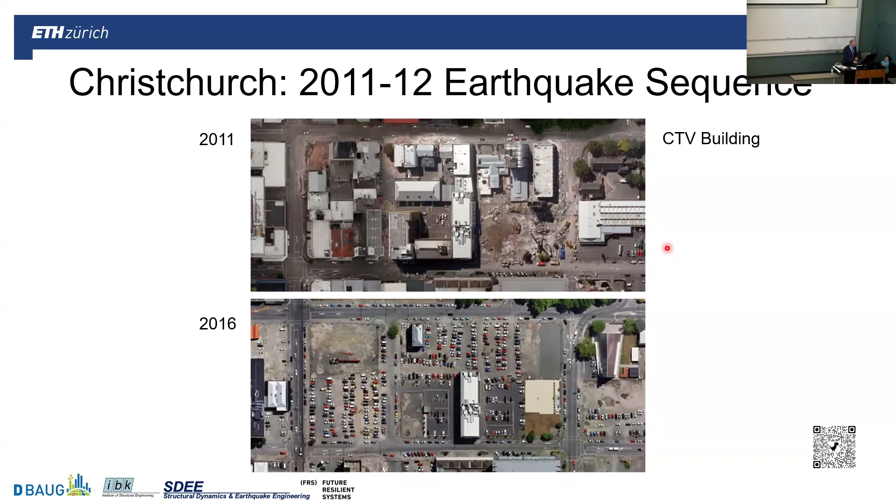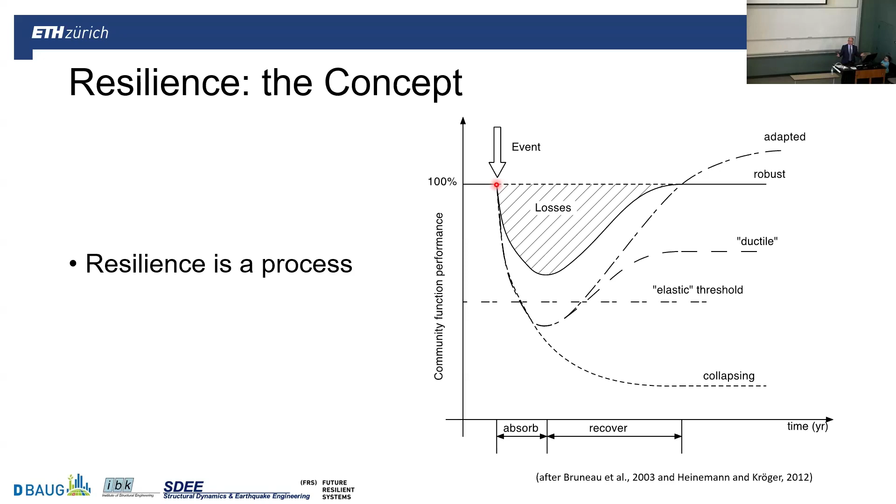When we talk about resilience, there are many definitions. There is even a presidential definition here in the US. But whatever they are, this resilience thing is a process. It is not a static situation that we have. It is a process of acceptance, absorption of losses after an event in the immediate aftermath, and of recovery in the longer aftermath—weeks, months, years—that leads to adaptation of a particular region or a particular structure to the effect of the disaster, the effect of the event, and improvement, or perhaps collapsing and just not being there anymore.

This understanding of resilience has been around at least since 2003, and in the civil engineering community, probably since a few years later. But it's already been 10, 15 years that we've been doing resilience-related research. And it's time now for action.

They will receive some funding that they're supposed to use to reduce the impact of climate change. That is the most important focus now, but also of natural hazards. So there is a mechanism instituted in law in this country that enables counties to do something. Are we as civil engineers ready to help them do these actions right? That is the question that I'd like to address.

How can we make sure that the communities that will have this funding, and the communities that won't but may see themselves as vulnerable and in need of resilience increase, how do we make sure that they are able to do something on improving their resilience, and do something right on improving their resilience?

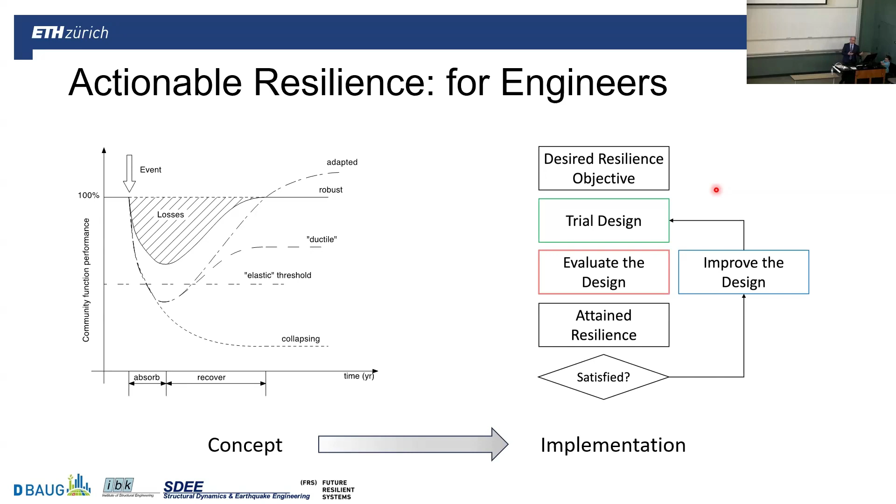So going from the concept to implementation, what I'll try to say is, yes, we can go and formulate a design cycle aimed at resilience. Let's start with the first ingredient, and that is the risk itself, the effect of the event on the community and on the particular structure.

When it comes to structures, for more than 25, 30 years we have been discussing the concept of performance-based design. It has to do with the recognition of the spectrum of damage that can happen to a structure. For convenience, we often discretize this into a few damage states, 4 or 5 perhaps. But it is the spectrum of damage and the spectrum of consequences—the deaths, the dollars, and the downtime—that we deal with in terms of performance.

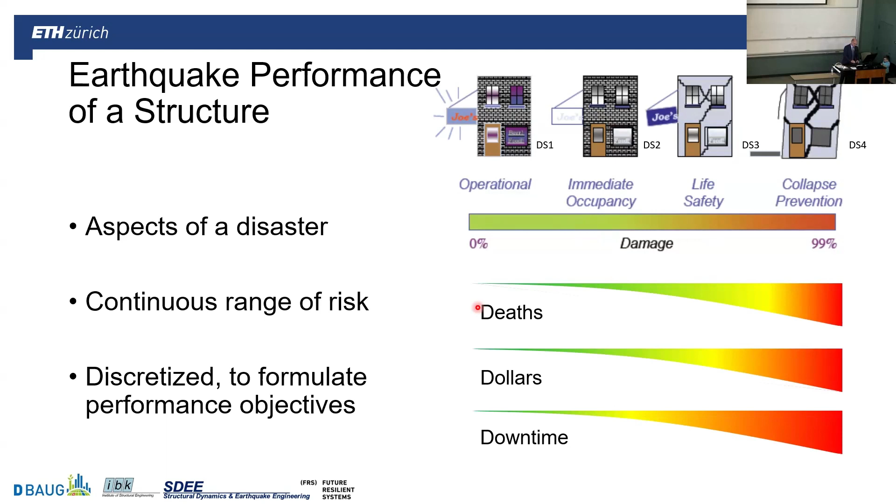This concept of performance-based design, thought about in the mid-90s, has pushed our profession from purely safety-based collapse prevention, safety factor type design, through probabilistic applications of reliability, towards designing for multiple performance objectives for a single structure. This is coming into practice, and is already in practice today.

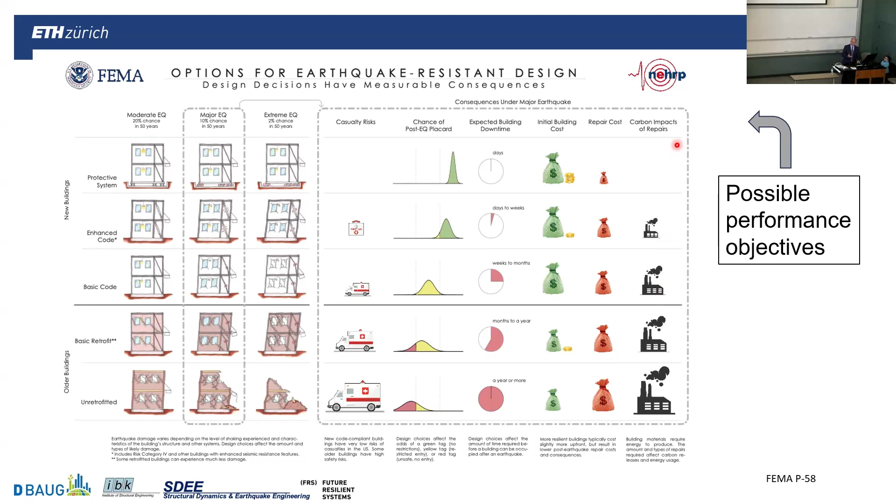So the number of performance objectives has also increased over time and started to include a much broader set than just dollars and downtime. This is the framework that was developed at the Pacific Earthquake Engineering Research Center, but also at similar centers around the same time.

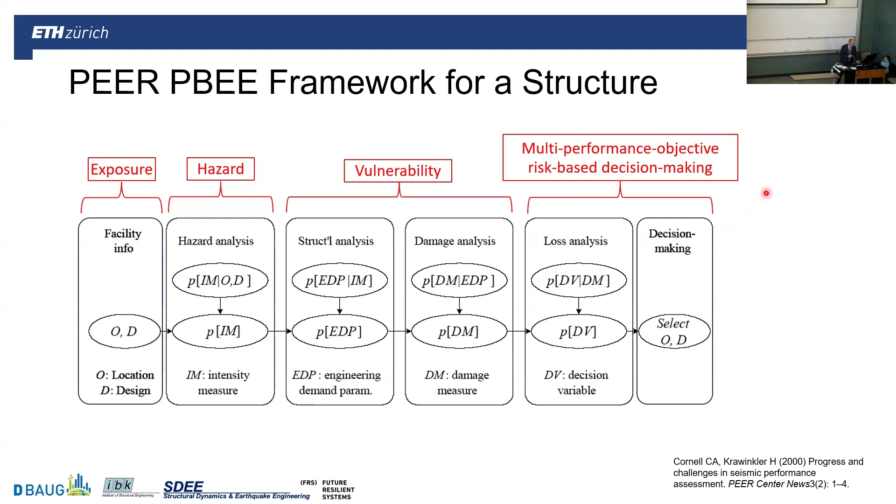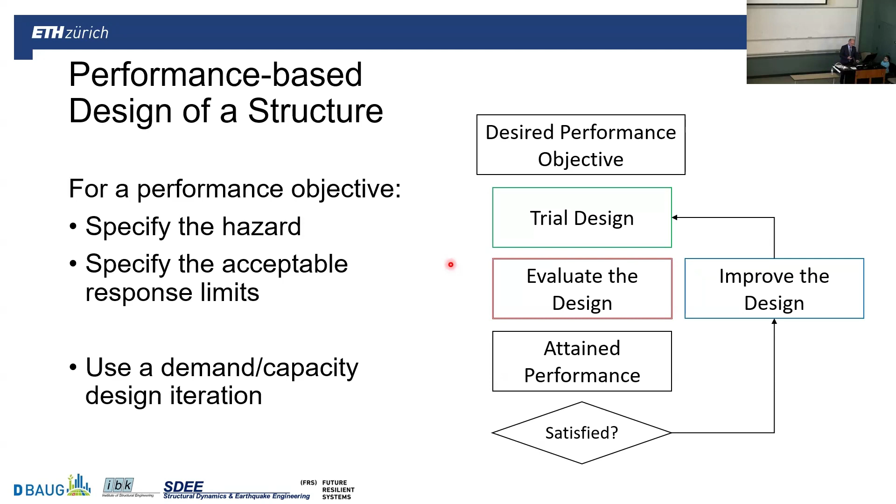This is how performance-based design is constituted today. For a specific hazard, we define the performance objectives in terms of the acceptable response limits. We develop a trial design, we evaluate the trial design. Many of you have perhaps done pushover analysis, some of you have done multiple time history nonlinear analysis to do this, looked at various aspects of the structure, determined if the performance is okay or not, and then perhaps changed the structure to make it behave better.

But what we noticed with some satisfaction is that in technically developed parts of the world where code compliance is high, we are not having as many casualties as we used to. Take the Taiwan earthquake a few days ago—it was a 7.4 in a relatively densely populated island. Even though we see similar soft story collapses as we usually do, the number of casualties is much smaller than a few decades ago.

And it has to do with the improvement of the buildings, but it also emphasizes another aspect of resilience, and that is this recovery process. What we want to do is design our structures so that yes, they do not kill people, but also they are relatively fast and easy to recover and reconstitute their function. So functional recovery becomes an important issue.

So we need to think about rebuilding from potentially collapsing situations, hopefully not too many of them. We need to think about repairs in situations when we have life safety performance, both of structural and non-structural elements. And then when we get to a situation when the building, or many buildings in the region, are just fairly okay—perhaps they don't have power or water—we need to talk about restoration of building functions.

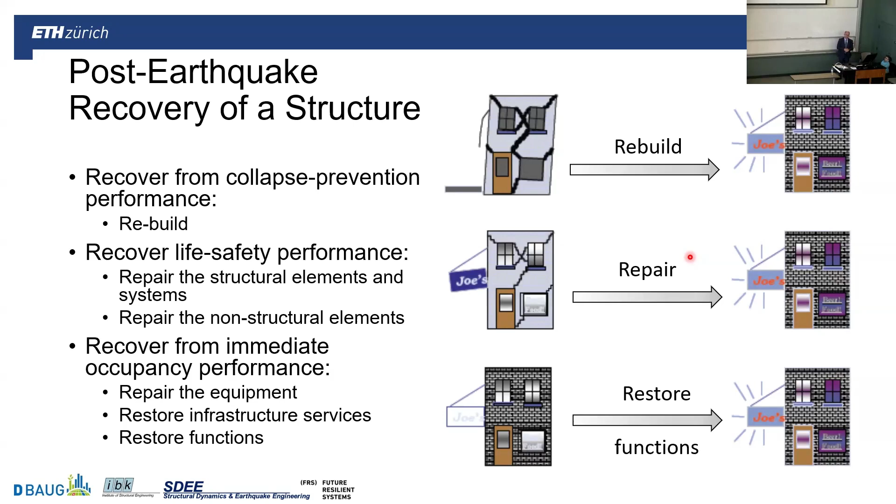In that sense, the process needs to be understood, the process of recovery. One thing that has been emphasized—Professor Mary Comerio from Berkeley did this in the late 80s—is the set of tasks that one has to do before a building repair or recovery needs to start.

Those are inspections, the cleanup, the design of the actual repair, the financing and contracting of that, then the permitting, and then the mobilization of the contractors. And only then can the repair start.

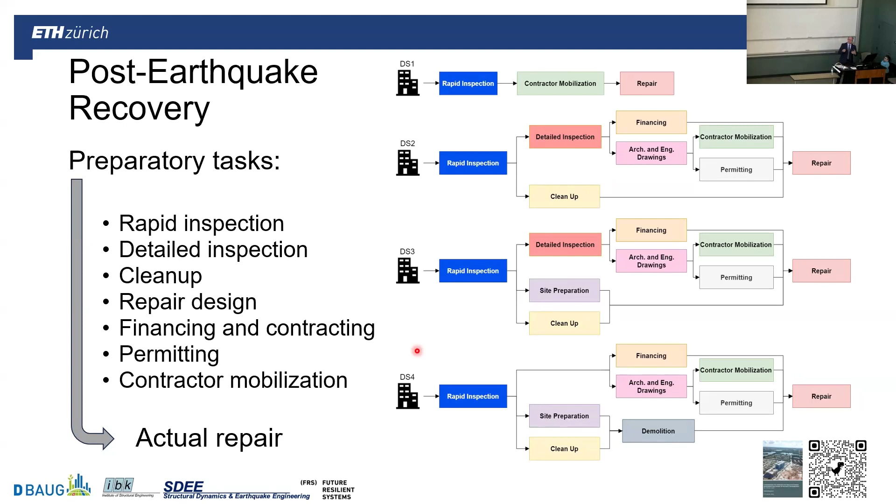You can see from damage states 1, small, 2, 3, 4, that the amount of actions needed, some in parallel, some in series, is growing. This impeding factor structure is an important consideration in the recovery process, as it can take months to do so. We have examples from various places where permitting, design, and insurance have influenced how long it takes to even start the repairs. Understanding this sequence is quite important.

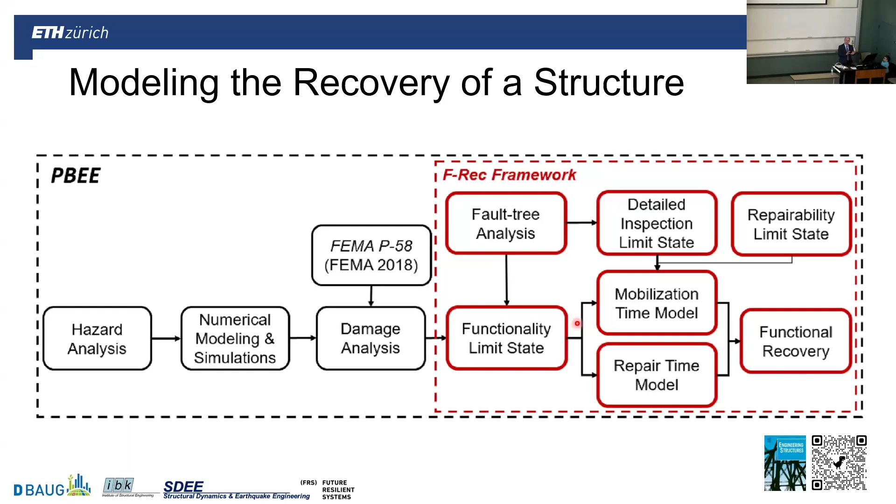To expand the performance-based engineering network, I take the framework called F-Rec, developed initially by Vesna Terzic, and also my student Nikola and I worked on this lately. It is an addition to the performance-based earthquake engineering framework that takes it from damage analysis and looks at the functional limit states of the building, the mobilization time, the impeding factor time, and the repair time to functional recovery. This framework is similar to the ATC 138 framework, but we attached the F-Rec framework to the end of the PBEE framework. Here is what happens.

Here is a 42-story building. Where did Vesna get the information about the variety of things to do - repair of structural elements, repair of non-structural elements, climate control equipment, elevators? She interviewed people who did this after the Northridge earthquake.

These are the two Gantt charts of the sequence of activities along the height of this building, produced within this F-Rec framework, that tell us how fast each one of those elements is going to be repaired. You can also see the different times it takes to do so, given the unlimited and the limited resources in terms of repair resources, material, machinery, and manpower.

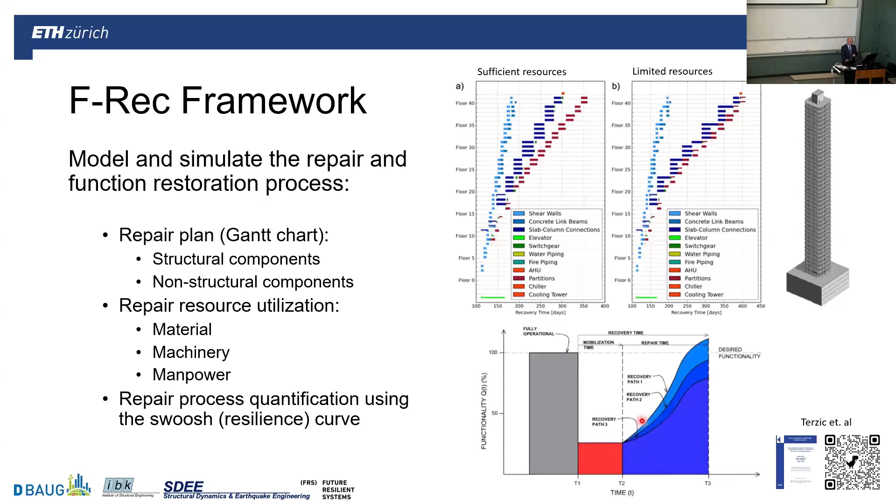So again, looking at the resilience curve, the swoosh curve we got used to in picturing the resilience process, it can also be drawn that way and quantified quite nicely - seeing the pre-event functionality of the building, the drop in functionality, the long-lasting drop because of impeding factors, and then the gradual recovery of that function.

For a single structure, we can separate and insert the recovery portion into the performance-based engineering framework, keeping the exposure, the hazard, the vulnerability portions, inserting the recovery portion, and then continuing with loss analysis that now includes the monetarization of time lost in the recovery process for the businesses in that building, or the shelter provision or housing provision of that building, and continue making decisions using multiple performance objectives that include the recovery aspect.

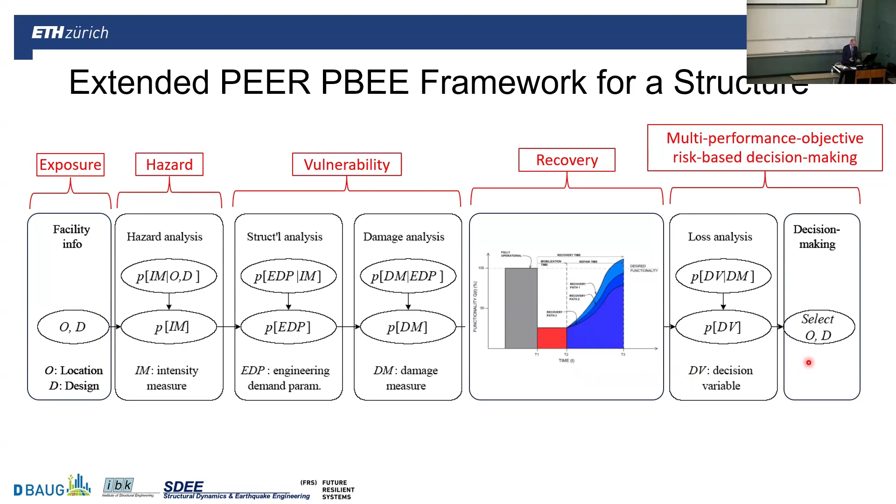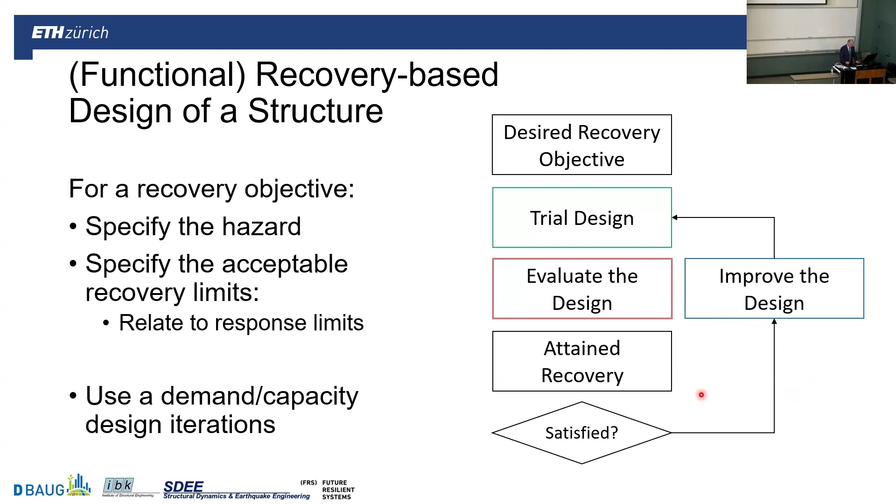So for a single building, we can clearly do this, and this is something we can also put into the design framework: set up some recovery objectives, develop a trial design, evaluate that design. Of course, that evaluation is more involved - we need more data, I'll get to that at the very end - and see if those recovery objectives are met or not. So we can design using that process.

But now when it comes to communities, when it comes to recovery of many things affected by a disaster, I have to emphasize the regional aspect. A city, a community is a system of systems, and it is a spatial system of systems. One thing affects the other, and there are important interdependencies that we need to analyze.

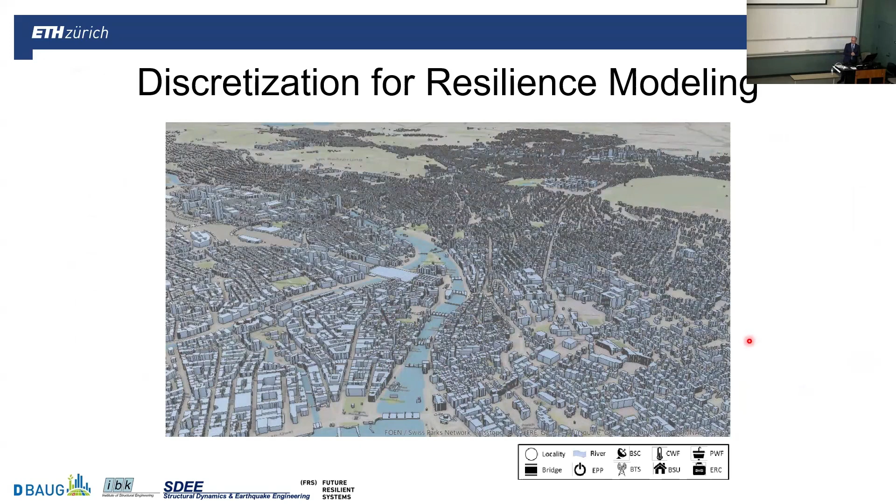To do this, what we started to do at ETH some 10 to 12 years ago, is to discretize and develop a discretized image of the community with the buildings, the structures, the elements of the infrastructure system - power, water, transportation, communication - and then look at each one of those elements of the model, housing, power, water, transportation, communication, in terms of the supply and the demand.

This is important. A power system delivers a certain supply of power, but it is used only if people are still there to use it. Producing, recovering the entire system very quickly before the population is ready to return to houses is fine, nice, but then you have to basically ground that power - you have to slow down production until people come back.

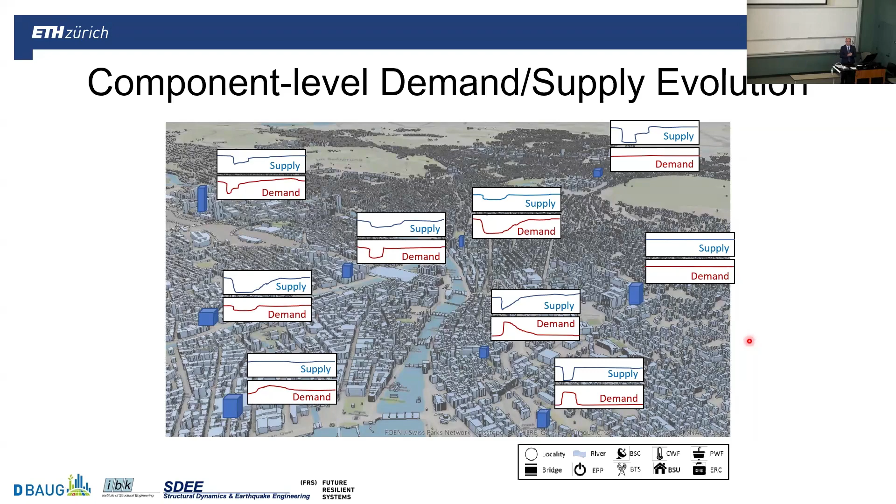This supply and demand balance is okay also for the water system and the housing, and the interdependencies can be captured using flow models. So what we do is we understand that there are interconnects - that a house needs power and water to function, that the power system may need water for cooling, that the water system may need power for pumps.

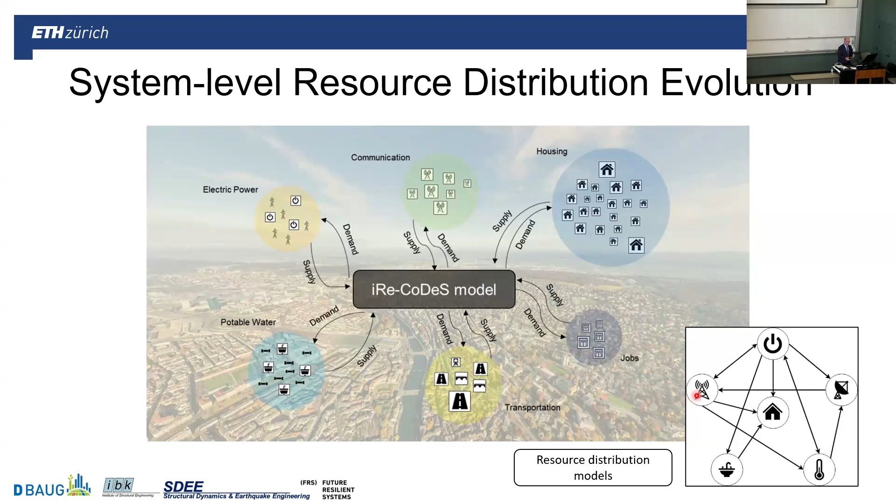And these interdependencies can nicely and easily be represented through the supply and demand consideration. And what we do this with is this I-RECODES framework. It is the interdependent resilience consumption, demand, supply framework that looks at how much supply is available, how much demand is realized, and then the smaller of them is the consumption.

And we did try this with large systems and also this small system to identify what goes on in there, and look at interdependencies and these kinds of correlations between what nodes have power and whether the water system is supplied or not. What are the houses doing? Are they just shelters, or do they have utilities so that they can function?

So these kinds of analysis enable us to identify elements of the swoosh curve, of the resilience curve, that are produced only and solely by interdependencies. This gray area does not occur if we eliminate interdependencies from the model, but does show that in this particular issue, the power system was unable to function because the cooling water was not available.

In some other simulations, we see that the communication system, the SCADAs that now operate our infrastructure, if they are affected, then still that system is not going to work.

The other thing that we did here is to look at supply and demand, not only of the resources that are needed for operation, but also those that are needed for recovery - the material, the machinery, and the manpower for recovery. And those become a separate set of resources that can also be tracked in the region, and their availability or not affects the recovery times.

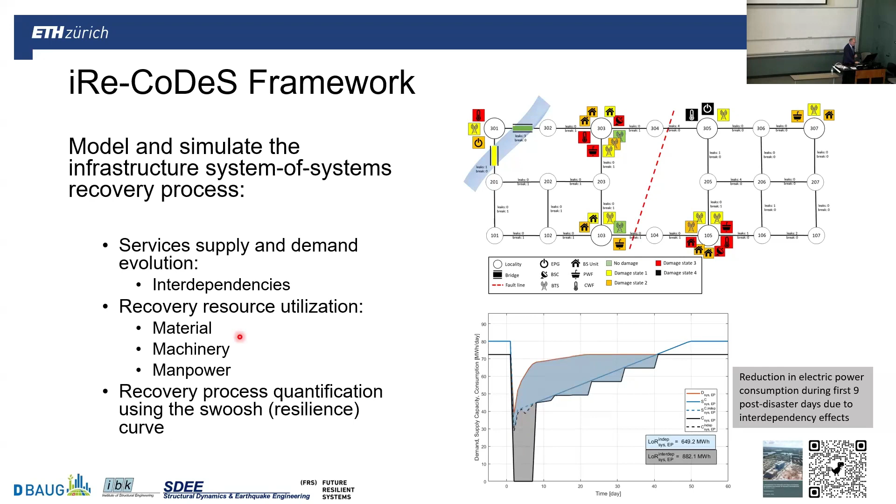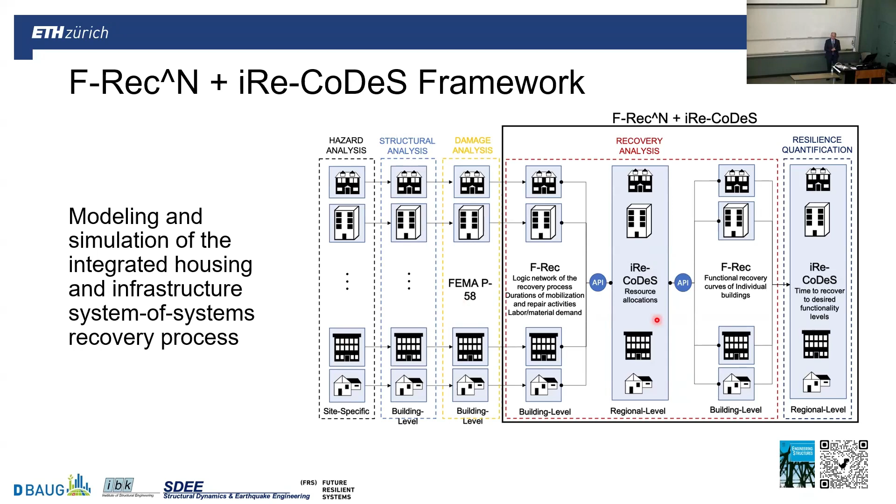And so to apply this regionally, what we did is to combine the FREC framework n times for as many buildings as there are in the region, and then look at their recovery, not only in terms of their repairs and readiness for function, but also in terms of their demands for people, repair workers, repair materials, and repair machinery, and integrate that in this I-RECODES supply and demand framework to produce a regional combined analysis of the recovery of the housing and infrastructure systems.

And this is one of the outputs of such an analysis. We did case studies - this is San Francisco, downtown, about 700 buildings. This was done using SimCenter software and their examples, their GIS of the city, their case study earthquake there, their vulnerabilities of buildings. We used FREC to estimate repair times and recovery times.

And that is assuming that there is a loss here of about 40% of the shelter capacity, beds in houses, and the recovery of that shelter capacity back up.

So we can do this regionally, individually for a house, whatever the decision maker needs. But one thing for decision makers to notice is that the time to recovery here is 1,000 days. That is 3 years - it takes a long time. And so it's no wonder that after Katrina, after the Christchurch earthquake, we have had long recovery times. It is the processes of rebuilding that we are doing.

Here is an animation of that same case study with a shelter supply graph on the top as to how it drops and increases, and also the demand for workers that is needed for that recovery process to go on.

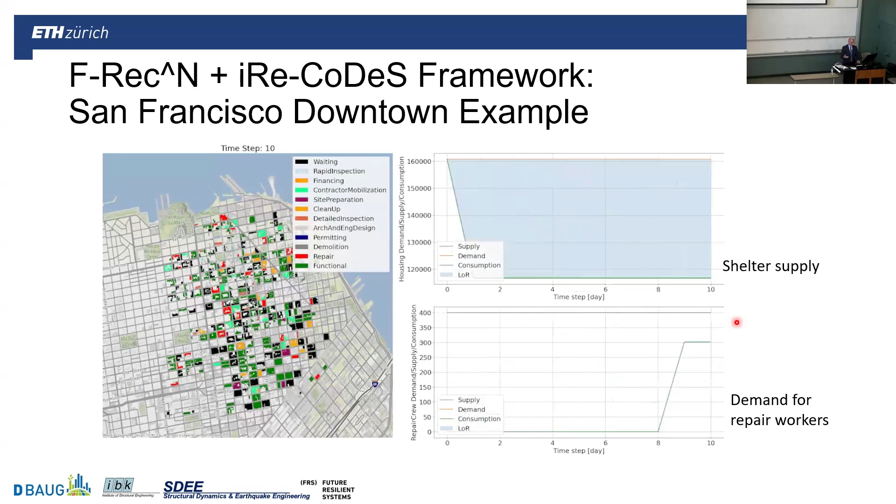And so basically, if you don't have enough workers, your recovery will slow down. And that, I think, is quite an important piece of information for decision makers, not in the immediate aftermath of an earthquake, but perhaps a few weeks later, to know whether the local worker supply, machinery supply, material supply will be sufficient, or if they need to contract people outside, get some more help from elsewhere. And so these are case studies that I think are quite useful.

And in terms of functional recovery, here is the same localities, but this is the electric power recovery. So we would know when shelter capacity is restored and when electric power would be restored to those regions. And you can see here we're talking not 1,000 days, we're talking 100 days. So there is a discrepancy in how fast we can recover infrastructure systems versus how quickly or slowly housing recovers.

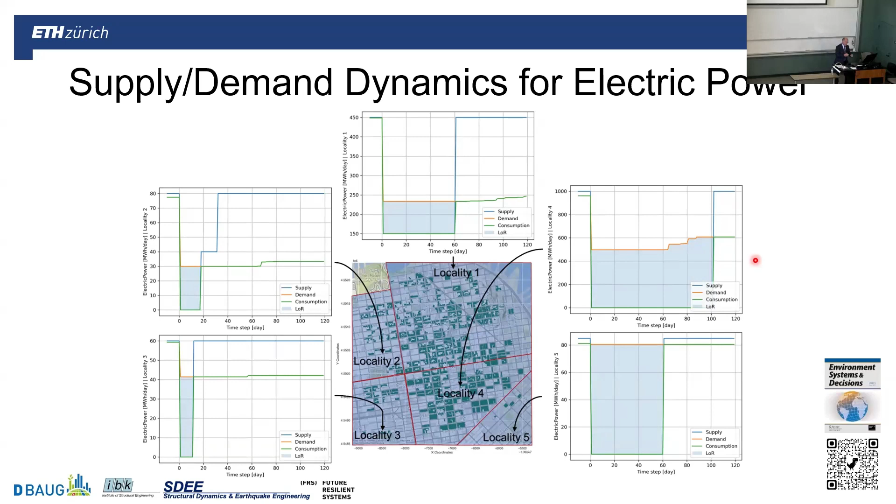An infrastructure system is, well, regional, different, integrated in a different way. Houses are very one by one and very geographically distributed. And so this is something we could also think about how to synchronize the two processes.

But nevertheless, we can get into a situation to analyze another problem, a more people problem, and that is the one of reoccupation of housing. So on the technical side, we can estimate when the shelter capacity will be restored, when the houses are going to be safe to occupy, when their utilities are going to be restored, when they're going to have power, water, internet. And now we can ask a question about how individual citizens or households make a decision to come back.

What causes them to reoccupy their housing, what causes them to restart the infrastructure system demand and ask for power, so that the power system can deliver it.

We model this using the capabilities approach. In one of the previous lectures in this series, Paolo Gardoni addressed this notion of capabilities, but from the aspect of risk. Here we are thinking about how the decisions of the household to reoccupy a building feed back the demand, not only for housing, but for infrastructure systems in that region.

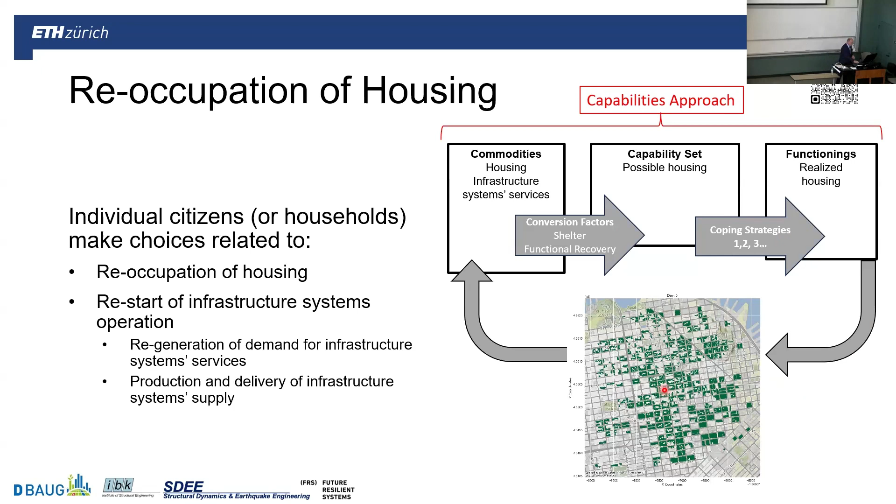That way we can look again at the regions of San Francisco, that same case study, and look not at the shelter or functional recovery of houses, but the actual decisions of people to come back, and look at the rate and length that the existing repaired and functional houses in this hypothetical case study will be reoccupied. Here, it doesn't only matter that the house is okay, but also whether the family stayed away for a long time and the children are already accustomed to the new school. That makes it less probable that they will return.

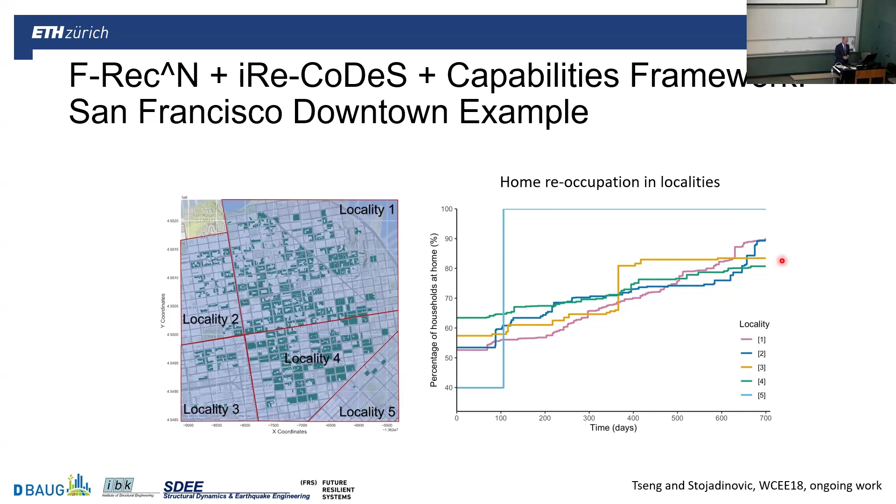These are important aspects, and they are contained in the software that we developed at ETH. It's called PyRecodes, the Python version of iRecodes, and it has a GitHub page. On that page is the software itself and a bunch of papers that primarily Nikola Blagojevic wrote, and other students in my group also contributed to. There is a wealth of resources for you to try.

What we are working on is to integrate PyRecodes with the SimCenter hazard and risk analysis software. Hopefully that will be completed during this year.

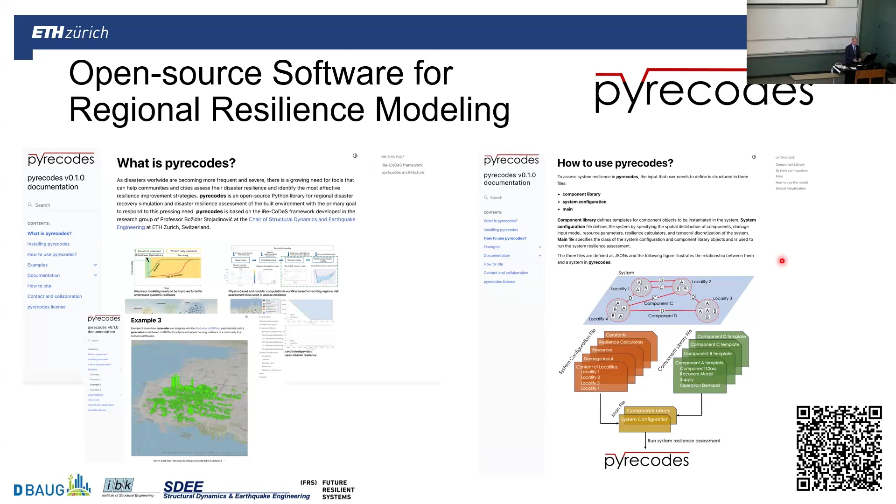But moving on from the regional aspects, let's take a look at the important questions of quantification of resilience. Why is this important? At some point, we need to ask ourselves, are we happy with what we have? So we need to know how much resilience we have.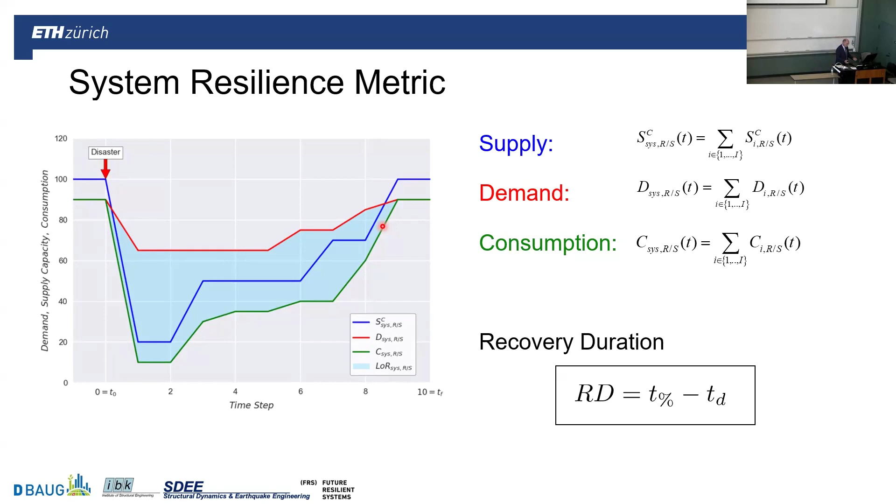And why is this good? Because this notion of measuring resilience is supported by the NIST 1190 document, and it was, at the end of the 90s, the product of SPUR, the San Francisco Urban Resilience Project that they were doing then. They said, well, we're going to have 3 phases of recovery: the short one, the medium one, and the long one, and time-wise we are looking for certain amounts of recovery of pre-event services.

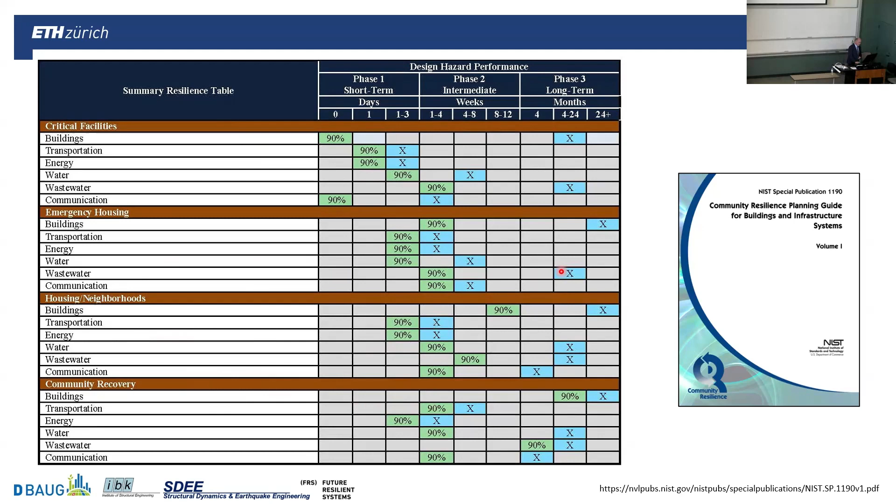Here are the buildings, for example; here is the emergency housing, water, energy, and other things, and overall community recovery. These are the desired numbers, and this committee estimated what the realities are. So there is quite a bit of gap we need to close if we want to make this example city more resilient. We can do this within the F-Rec^N iRe-CoDeS framework, combining the view of housing and infrastructure systems to fill out this table from the NIST 1190 document.

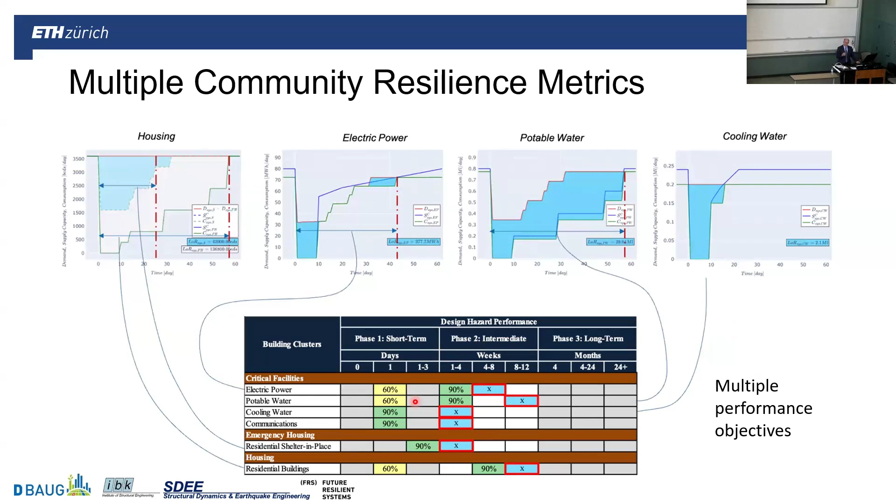Multiple performance objectives, multiple resilience objectives, each one evaluated separately, but the interdependence is still modeled using the supply and demand balance approach.

We can also do this probabilistically. We take a look at the hazard curve, generate a whole bunch of disaster scenarios, and look at the model in each of those scenarios, and the resilience plots for each of the systems modeled, for each scenario. It's quite a data-intense process, but we can distill them in terms of loss of resilience curves. This is similar to the risk curve we're used to from risk analysis of a building, but now these are three-dimensional because there's also a time to recover, a time dimension that is added.

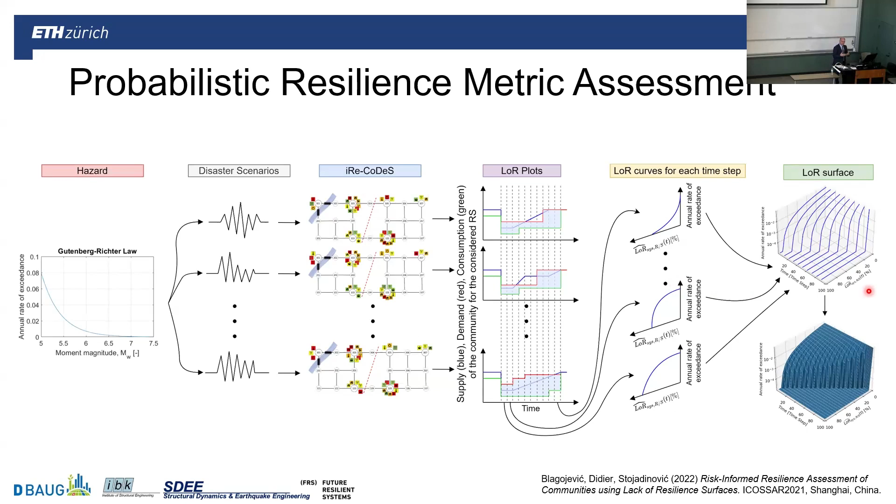So we can cut in terms of time and get the normal risk curves. One of these outcomes is, for example, what is an acceptable or tolerable rate of exceedance of a certain poor, unresilient performance, measured here in this loss of resilience area measure. We can also look at that in terms of the days to recovering a certain percentage of function.

This probabilistic tool allows us to fully approach the state of affairs in today's risk-based performance-based design, and ask pretty much the same questions. I come back to this: what is acceptable, what is tolerable, because this is also an issue about how to set the margins and where that comes from. This is also what Professor Gardoni discussed in this seminar last time, and it's a very pertinent issue if we're doing risk-based design.

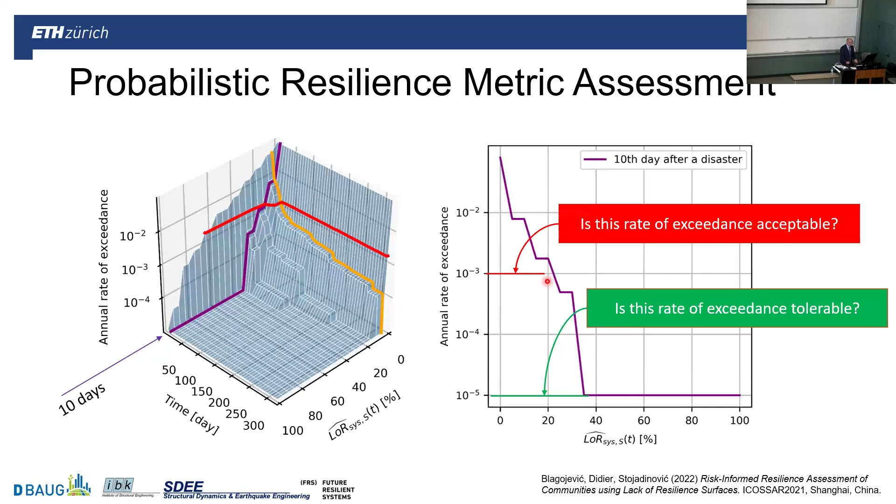And here we're going to also do risk-based design for resilience. So communities need to figure out what these numbers are, but we can compute them and help them do that.

Overall, there is a framework we can use for doing resilience-based engineering. It has the same start in terms of a hazard module, an exposure module, as all the other frameworks. It has a vulnerability module, now regional -- we need to know the exposure of buildings regionally, the exposure of infrastructure systems and all their components regionally. Then we move on to the repair recovery module for buildings and infrastructure systems, and then the quantification module for measuring how good or bad that region is doing in terms of its resilience.

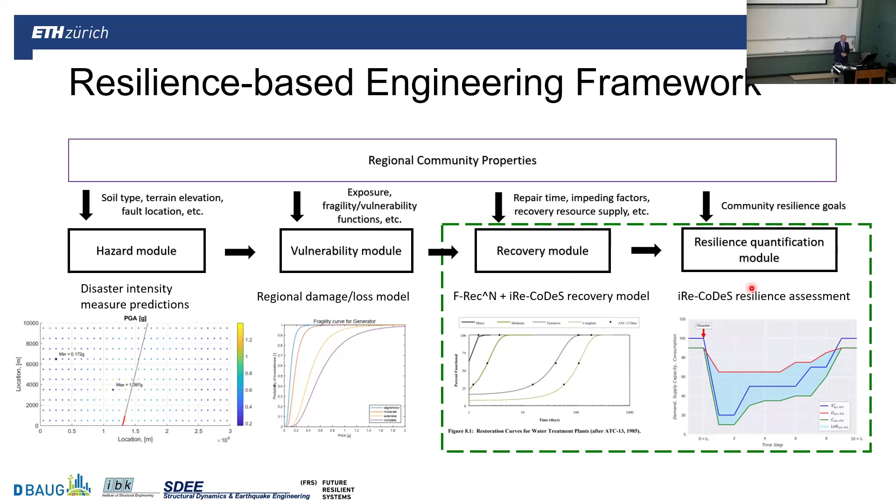With that in mind, I state that there is a way to constitute a design process by specifying the desired resilience objectives, doing a trial design, evaluating this design, checking how resilient that community is, and improving its resilience.

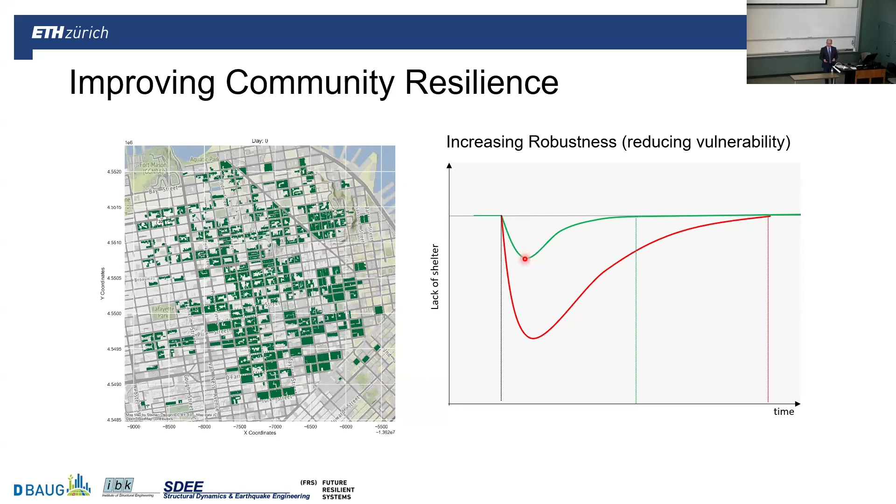When it comes to improvement of resilience, we can see this from the case studies we have done. One way to do this is to address the front end of the recovery process by making sure the damage is less. We can make the structures and infrastructure systems overall just more robust, reduce their vulnerability, and that works.

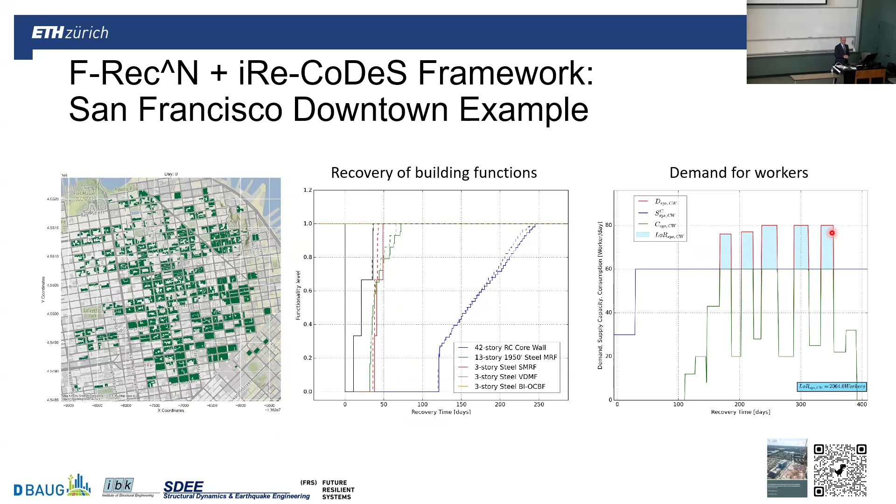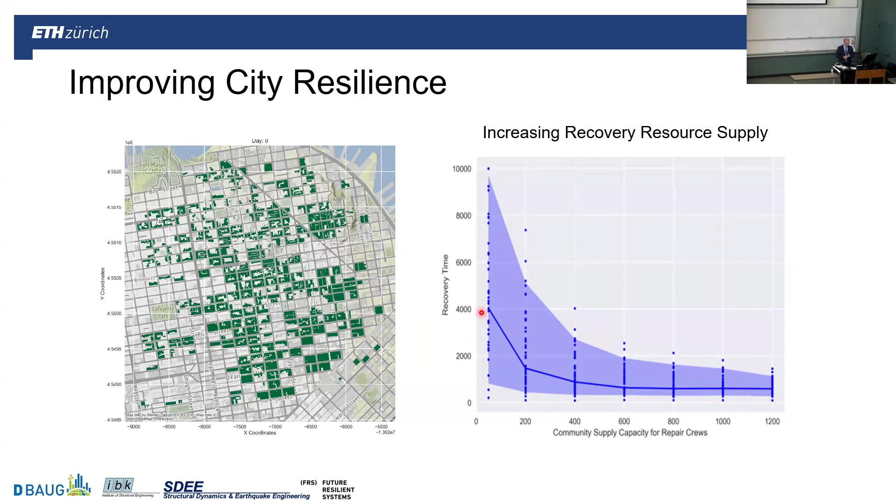So we can look at improvements not only in terms of robustness, but in terms of providing more recovery resources or timely scheduling of the recovery resources. This graph also shows there is a saturation point -- providing an enormous amount of workers will not specifically improve the recovery time, simply because they cannot all work in the city at the same time and have enough machinery and material. There's a point where impeding factors also affect this, where we can find some kind of average number of workers that will still enable a timely recovery, but not be too wasteful or too little with long recovery times -- also noticeable here is a large dispersion, a larger uncertainty in that recovery process.

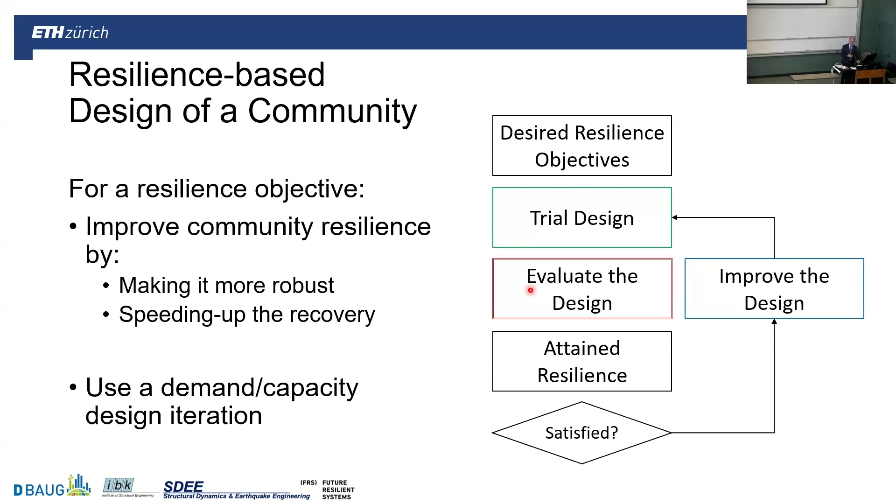So we can complete the design cycle and address very fully, in terms of the entire feedback loop, the resilience process.

One thing that remains, and I'd like to emphasize, is the change. Speaking to people here in College Station, my wife is an Aggie -- she got a master's here in '94, a long time ago -- and she doesn't recognize the city except for the water tower anymore. Her apartment building is gone. This city has changed. Your chairman told me that at some point there were 30,000 students.

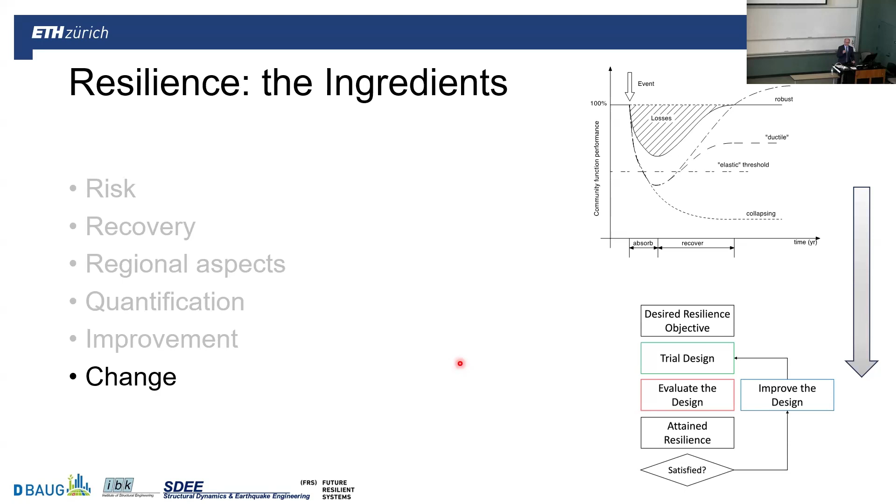Now there are 80,000 students at Texas A&M. That means, very simply, that if there was a resilience assessment 10 years ago, it would not be valid today -- it simply will not be valid. The hazard may not have changed, but the exposure has changed.

We also have not only new things being built and new people added, but also the aging of structures. In a city like New York, where there are few new buildings and many are remodeled, we have this issue of aging and change of use.

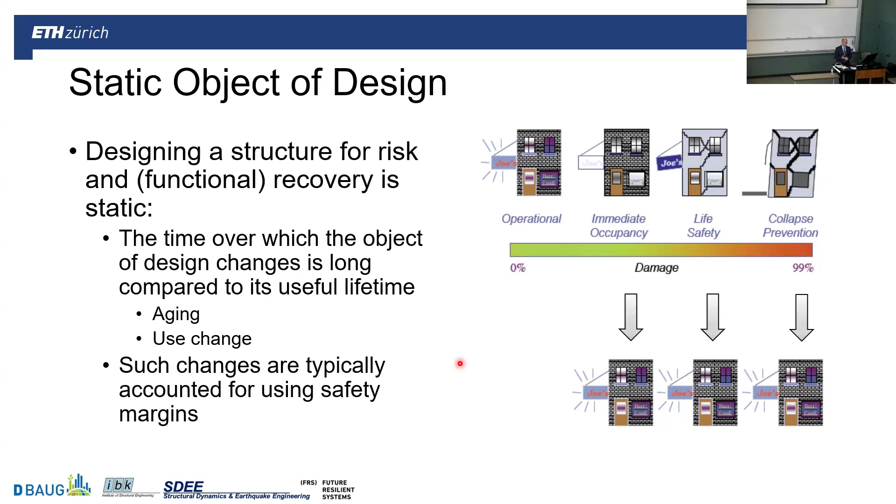Some buildings used to be residential, now they're schools, or the other way around. So how exactly do we take care of this dynamics of the environment, the dynamics of the structures, the dynamics of the society itself?

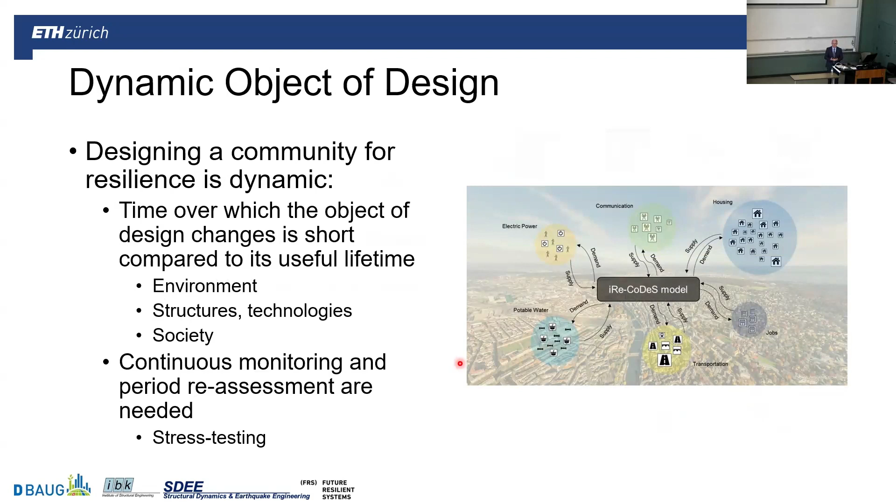The way that I propose to do this is through the process of continuous monitoring. Basically, a resilience assessment would need to be done every so often on a time scale, here 10 years, to take into account the enlargement and the change of the community.

And this is an opportunity for engineers, not only to gain good employment in repeatedly doing the same thing, but also to contribute to the urban development of the region very meaningfully, saying, hey, you're building in the floodplain, let's not do that. Because you built in the floodplain, we now need to take care of the water management, for example.

Such things don't exist for earthquakes, but perhaps you could suggest that more buildings could be base isolated, and so on and so forth.

And how do we do this check? It is very difficult to invert the resilience design problem. Perhaps someone of you will do it in the future. I have not done it yet.

So I suggest this scenario-based analysis, and there is a stress test concept that we can adopt from various other fields, to imagine what the city would look like in 2045, and to stress test it for some predicted hazard, say a past earthquake, because the seismic hazard doesn't change very fast, or a future 100-year flood, which is not the same as today's 100-year flood, and definitely not the same as the 10-year-ago 100-year flood.

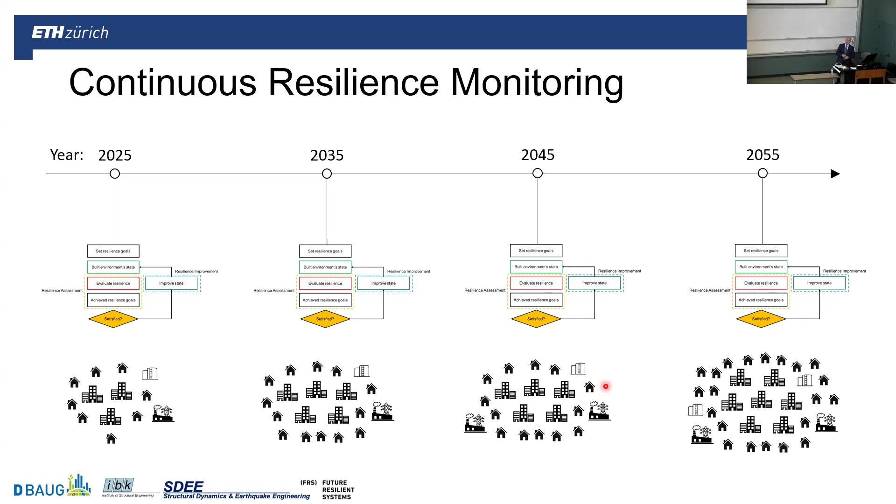So these are the aspects of resilience, and I think through this talk I covered the recovery, the regional aspects, the quantification, improvement, and the change aspect, to the point that I can say yes, resilience is actionable. We can actually do real stuff with it.

But how? Performance-based design for risk, recovery-based design when it comes to functional recovery, regional aspects, regional modeling frameworks. iRe-CoDeS is not the one. IN-CORE at the NIST Resilience Center based in Colorado State, but many people here have taken part in that, is also a very good framework.

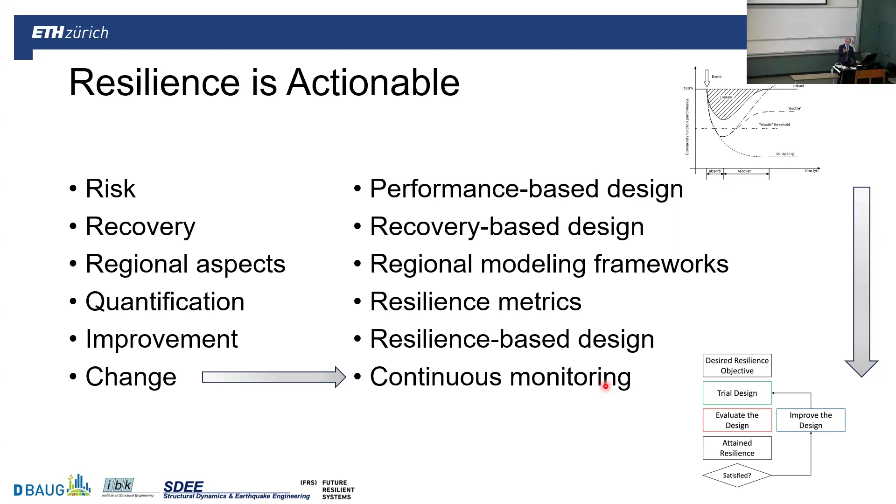Quantification, we have resilience metrics. We have probably too many, but we still definitely have them. Improvement, we can complete the resilience design loop, and the change itself we can handle using continuous monitoring. So the elements of the concept to implementation exist.

Let me just remind you that this is not a done deal. What we have, for example, for components are hazard and vulnerability data. What we need is more recovery data.

Professor Mander is here, did HAZUS version 1, I think, in the late 80s, beginning of the 90s, with recovery for bridges, if I'm not wrong. HAZUS is in version 5 now. There is quite a lot of good data there. Start with that, build on it.

Look at duration, but not only that, but resources for recovery. Systemic models, we have normal operation models for infrastructure systems in, as they would say, peacetime. What we need is recovery operation models, what the system does when it is not fully constituted. What does a water system do when the leak rate in pipes is very high versus not too high at all?

We need a lot more on exposure data itself, not in regions. We need to know regionally what are the building types, what are the archetypes there, what are the infrastructure system types, and then most difficult, validation of those regional simulation models. We need to collect longitudinally the data on recovery.

And then in terms of policies, performance-based design is a good example of how we move from ideas to code implementations. And today's codes, ASCE 7, the concrete code ACI, the steel code, the ASCE 41 on evaluation and repairs, are performance-based. You see always the tables with performance categories at the start of those codes.

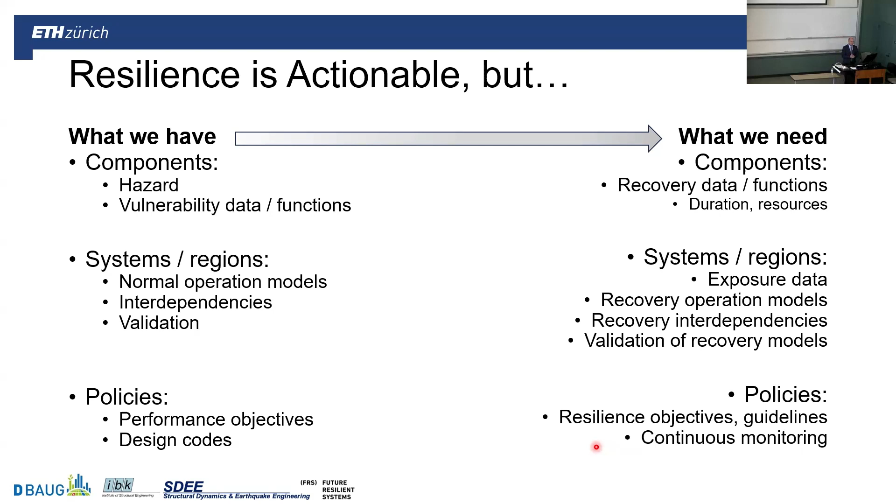We need something similar for resilience. And I also argue that within those resilience guidelines, we need the notion of continuous monitoring, to make sure that the resilience assessment keeps up with the changes, not only in the hazard, but also in what is exposed to that hazard, in the change of the communities.

So I think we are ready for action. I think the concept is a very good one, and we worked on it for quite some time. The understanding we developed is solid. We can constitute the implementation, the design loop. We have the elements to build it. It needs to be done.

It can be done. And with those tools, we can actually address the needs generated in the US by this Community Resilience Act, and help meaningfully these 483 counties that are designated and will receive some funding to improve their resilience, they say for climate change, but also for natural hazards.

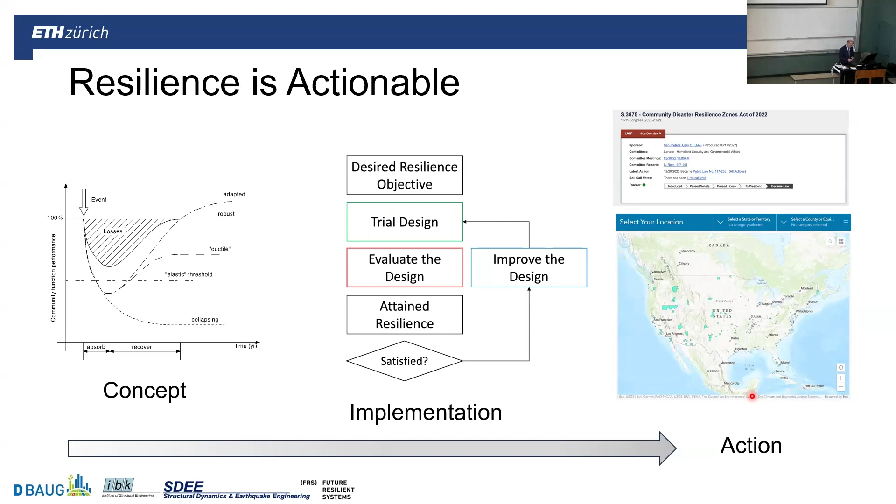And so this is what I hope to have convinced you in this talk. Before I end, let me thank the people who worked on it.

At ETH in Zurich, it is Dr. Nikola Blagojevic, but before him, Dr. Max Didier, Dr. Li Sun, who's now a professor in Cardiff, and Vesna Terzic, who is a professor in Cal State Long Beach, and she worked on the FREC module. Then in Singapore, ETH has a large project there, the Future Resilient Systems Project, now in its second phase. There, Mr. Lawrence Tsang and Mr. Hamed Hafeznia are also doing their PhDs on this topic, Lawrence on the capabilities approach and Hamed on optimization of resource distribution during the recovery process.